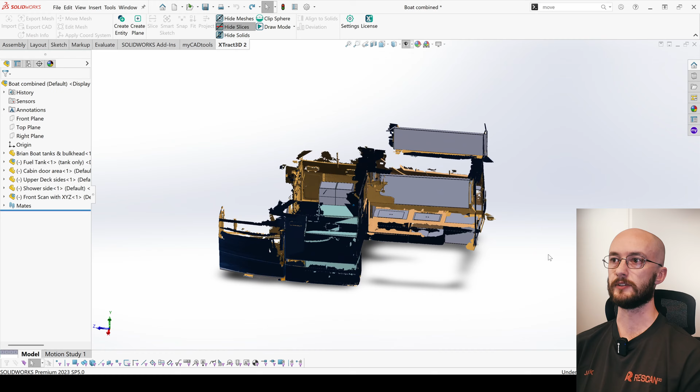There's a bunch of different areas we've been working on. The client designed this kitchen himself. I've dropped his model into my main assembly, but I've done the wall panels, floor panels, deck hatches, panels for inside the tanks, the shower structure, and in this video we'll be doing new handrails for the upper deck, as well as sheet metal trims around the main cabin door.

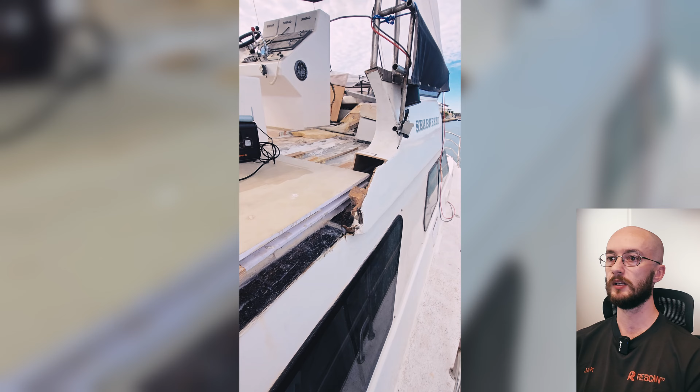The client recently replaced the upper deck floor with a new sandwich panel, and we'll be scanning that and the stanchions at both ends to then model a new handrail, moulded to match the existing shape of the boat.

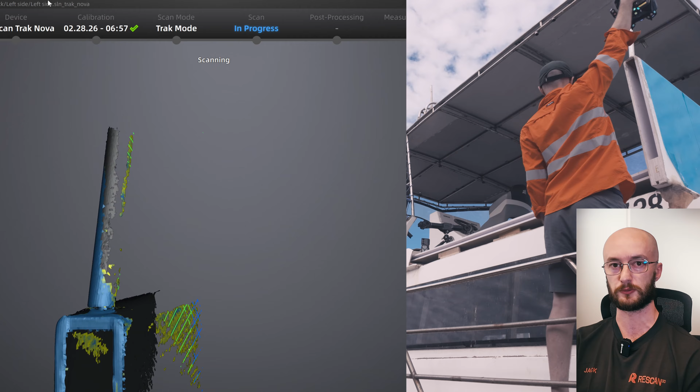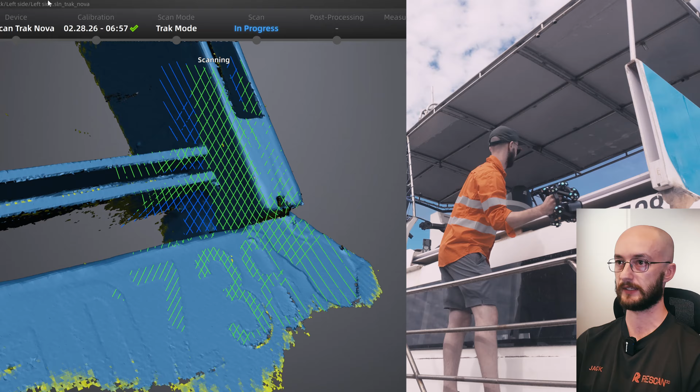We're in full daylight, no surface prep on the boat, no targets, and the scanner's fully wireless so there's no risk of getting tangled in cables. It's performing pretty well in full daylight - not 100%, but this is one situation where scanners really struggle. They measure with lasers, projecting light, so with lots of ambient or direct sunlight they often just can't produce an image. But this scanner does a lot better than pretty much any other one I've used, which makes this job a lot easier than it could have been.

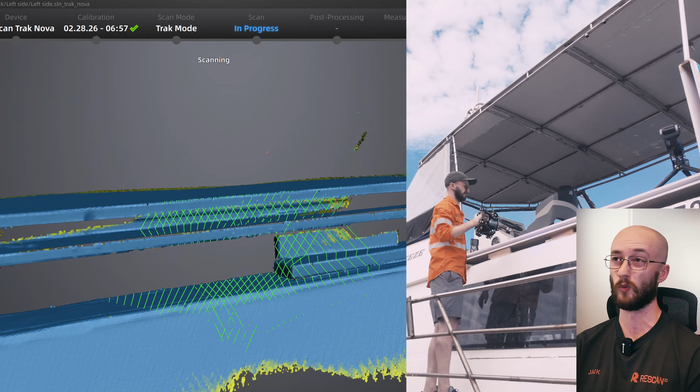Over this 3 meter length, the accuracy we'd expect is about 0.1 of a millimeter, which is wildly overkill for the application - we're putting 2 to 3 mil clearance around all the panels we're drawing anyway. So accuracy doesn't matter for this job, but just as a point of reference.

We're doing this all at about 3 millimeter resolution, just to speed it up a bit. Not particularly high detail, but there's no need for that detail in this application, especially where there's mostly smooth surfaces.

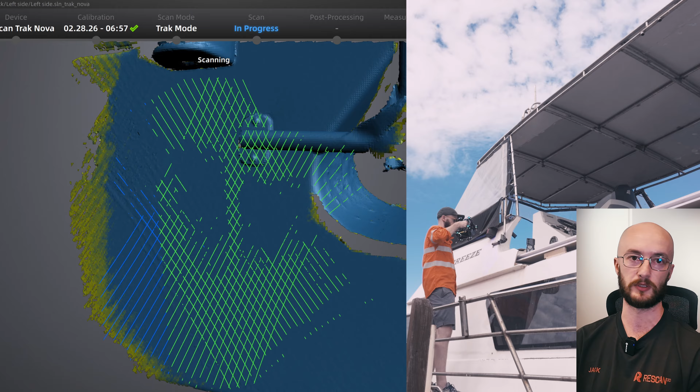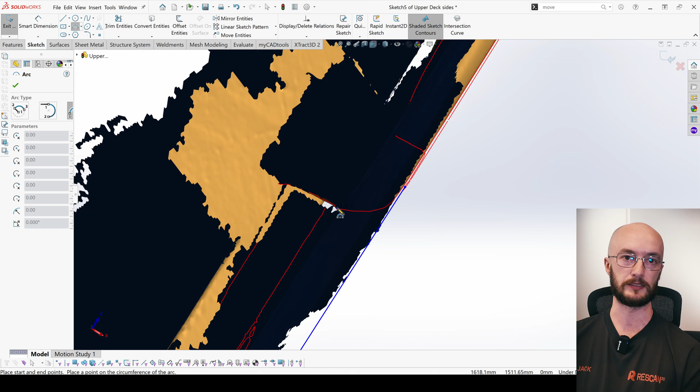Once we've finished the scan, we'll first align it to global coordinates, basically the XYZ in your CAD program. Now we're in Solidworks, where I'll create some planes to start sketching those side panels. You can see we're creating these slices, the red lines, which are basically an outline of the scan on a specific plane, letting you easily sketch around the scan geometry much more simply than otherwise.

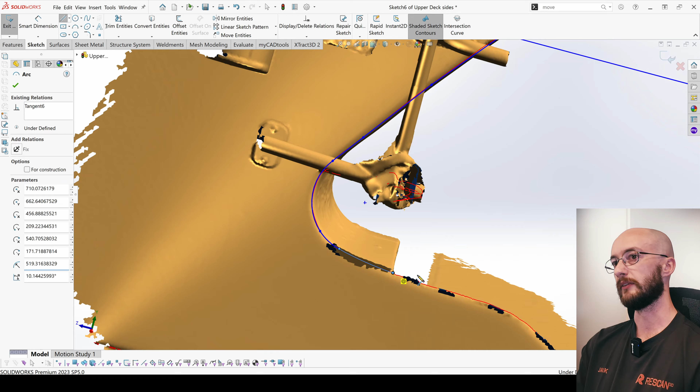I'm using a plugin called XTract3D 2, inside SolidWorks, which lets you work with scans much better than SolidWorks does by default. It's a really good plugin, great value for money. It's not the most capable for scan-to-CAD stuff, certainly not compared to Geomagic Design X or something like that, but there's not much I can't do in this plugin with SolidWorks.

I'm finding the speed benefits of working directly inside SolidWorks outweigh the clunkiness or lack of tools that XTract3D might have. You've just got to get a little more creative using the SolidWorks tools, especially for surfacing. For a job like this though, it's perfect.

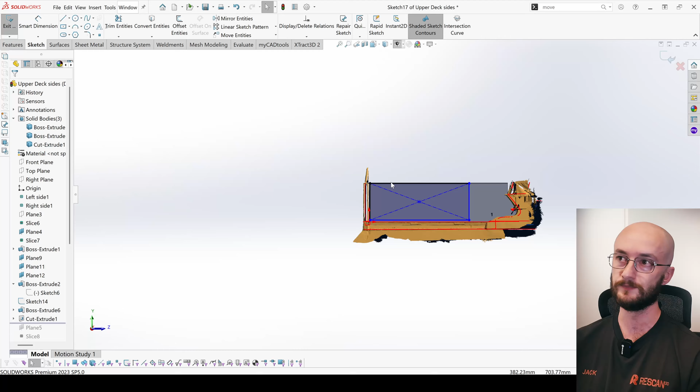You can see I'm basically tracing around these red lines, the intersection with the scan on a plane. Then I'll create a closed shape and offset it by a few mil inwards for extra clearance. We changed the design a couple of times during this process, which is why you might see some features done in a slightly illogical manner.

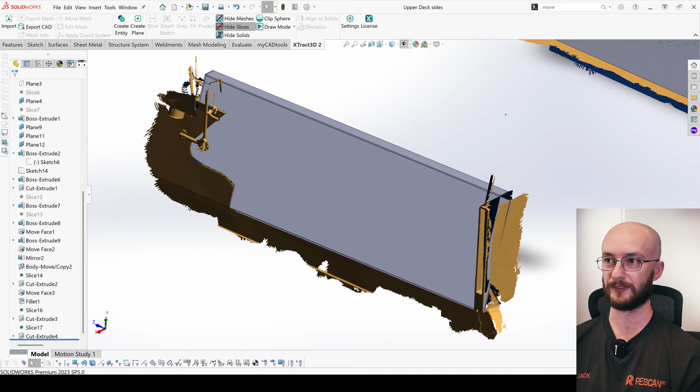We ended up with an angled outer panel which locks into the radius cutout at the end, then a top piece, a vertical inside piece, and a cap at the end. Since filming this footage, we've changed the design again to make the end cap angled to line up with a body line on the inside of the boat, just to make it look a bit neater.

So that's pretty much it for the handrail. I sent these files off to the client, and his CNC routing people cut them straight out from the CAD files. Obviously we could do DXFs or dimension drawings if needed, but in this case it was just the CAD.

There are a couple of jobs down inside the cabin as well. We're scanning above the fuel tank to make a drop-in hatch cover, and then we're going to do around the door frame for some sheet metal trims. This is real-time footage, so you can see how quickly the scanner picks up the surface data.

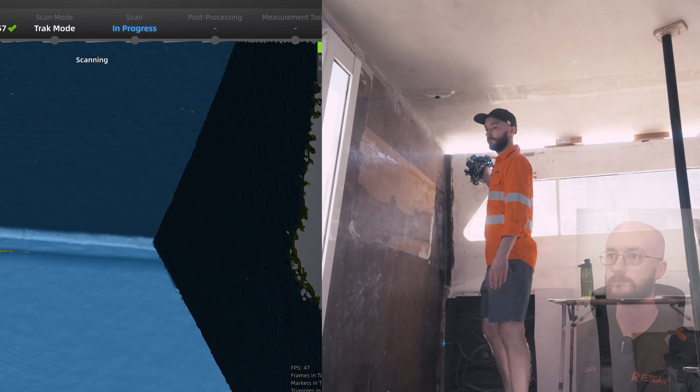Again, we're back in SolidWorks drawing some of these sheet metal parts. These are all going to get laser cut out of 1 mil aluminium, bent, then powder coated and siliconed in place, which should end up looking really good.

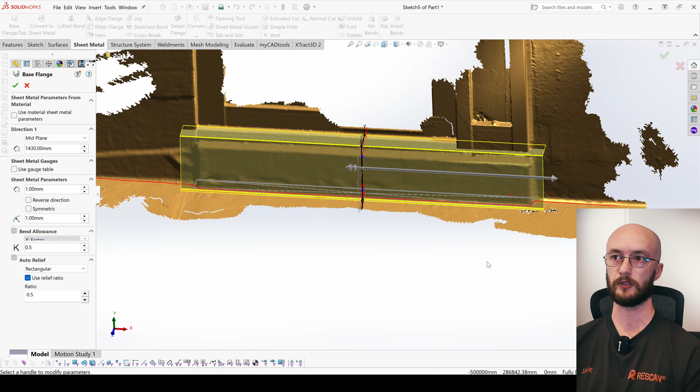Again, we're tracing over these red lines, the intersection slices. This gives us a really tight fit to the existing wall and floor. We're notching around various parts of the door frame, and we've added a couple of returns to go back to the wall and trim those to cut out exactly to meet the wall.

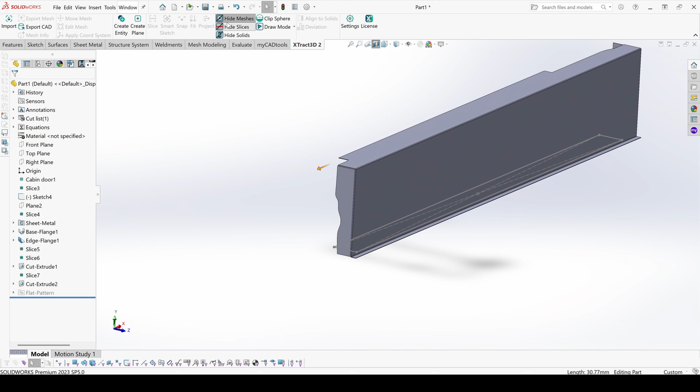And then we're doing the same thing across the top of the door, but full side to side across the width of the boat, just to cover up that gap above the top of the door frame.

So there you go, that's a bit of the process of turning a 3D scan into a usable 3D model for CNC routing or laser cutting.